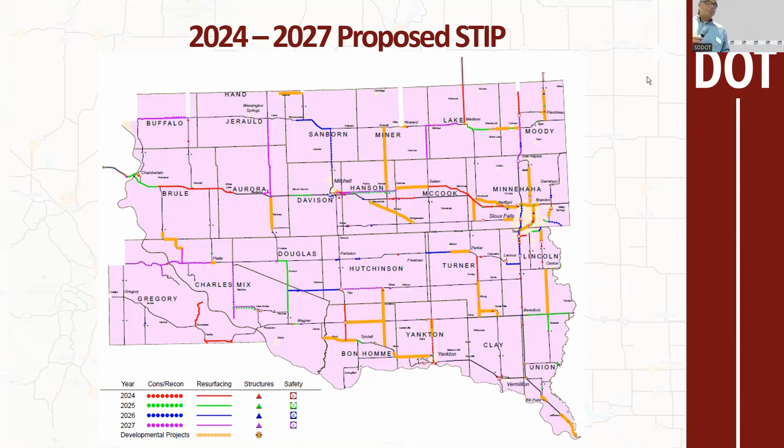If you didn't get a chance beforehand, take some time afterwards and look at what we have available. Again, we are here for engagement and collaboration. I challenge you to start writing down ways you think we can help improve safety across our state.

In order to maintain or build a transportation network, we need funding. As we look at the funding anticipated over the next 4 years, we range from $1.2 billion to about $900 million. A couple of big projects are really looped into that mix.

For those of you that travel that Platte-Winner area, we have a small bridge down there over a mile long. That bridge alone is anticipated to be over $250 million. Some of you are intimately familiar with it tonight, others may not be, but we are planning to reconstruct that bridge starting in 2024, probably a 3-year project.

It's a huge undertaking for us. We thank our partners in getting that project to where it's at today. We look forward to that construction project being approved by Federal Highway Administration this fall, so we can get it out the door. A great project.

But it takes funds, it takes those dollars in order for us to invest in that transportation system. And that's paid for by user fees. Whenever you're driving on that road, you have a fuel tax — the fuel you put in your car, you're burning fuel, and that fuel tax helps pay for those roads. Also vehicle excise tax. Those are the user fees that help build and maintain transportation.

Whenever we have an investment, that opportunity to invest, what are our first priorities? Our first priority is going to be safety. Our goal is to get everyone home safe every day.

This shows a history of crashes, serious injury, and fatal crashes in South Dakota in recent history. We were on an excellent trend through 2019, 2020, 2021, and then not so good — something we saw nationally. A lot of driver behaviors got involved: speeding, unbelted occupants, intoxicated drivers. We really started to see an uptick in those years.

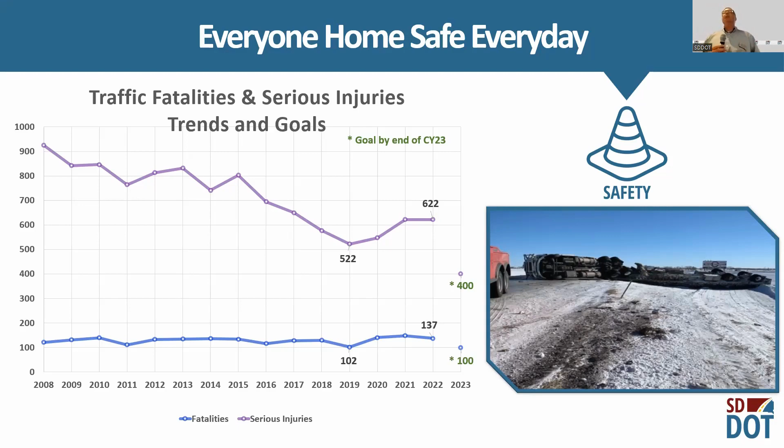We've tried various countermeasures and we're going to continue to be innovative: centerline rumble strips, shoulder rumble strips, high friction surface treatments — all things intended to keep that driver on the road when maybe they're not paying attention, maybe they're making a mistake. We all make mistakes, we're human, it's going to happen. But what can we do to help correct that driver so they don't run into somebody else or crash themselves?

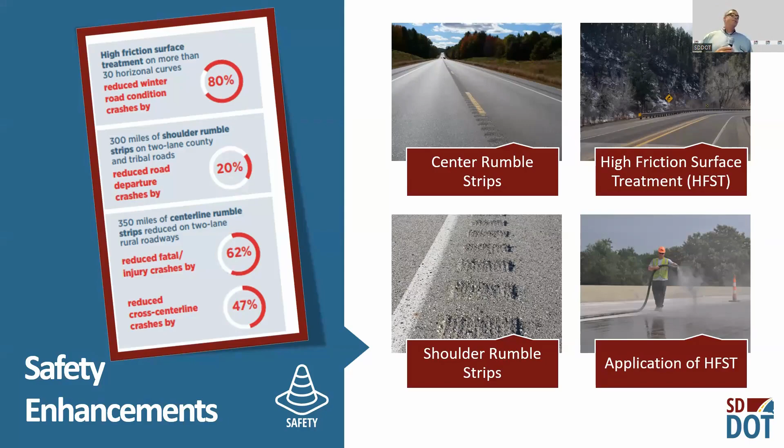Other techniques we've used are diverging diamond interchanges. We actually got our first one open — if you get out to Rapid City, please take the LaCrosse Street interchange and let us know what you think. We had an opportunity to be out there about a week and a half ago, and it was working marvelously. People got through there very efficiently.

For those who've been out at the LaCrosse Street interchange and ever stopped trying to make that left turn movement, you know that sometimes you get backed up for a block or 2 blocks, especially in the morning. It was just unbelievable how seamlessly that worked — people knew where to go. Pedestrians too, I think I saw 6 pedestrians using that facility while we were there, and they felt comfortable. It was a very good improvement, and we're expecting and hoping for the same thing here at 41st Street.

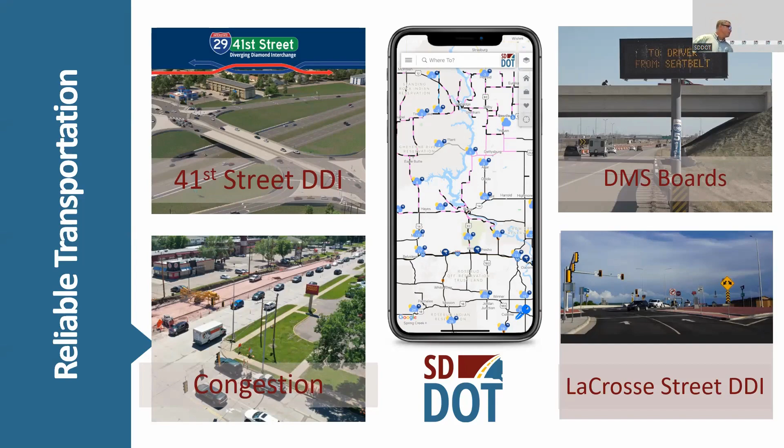Now, Travis, I know safety is a priority for the region as well. Maybe just go over a couple things you're doing here in your Mitchell region. Yeah, absolutely. Next slide there, Levi.

Like Mike said, safety remains our highest priority on our roadway system. Over the next 4 years, we'll have approximately 29 grading or shoulder widening projects here in the Mitchell region. This graphic gives a general idea of where some of those projects are. Our shoulder widening projects are meant to mitigate roadway departure crashes, which are really prevalent in South Dakota and a lot of other rural states.

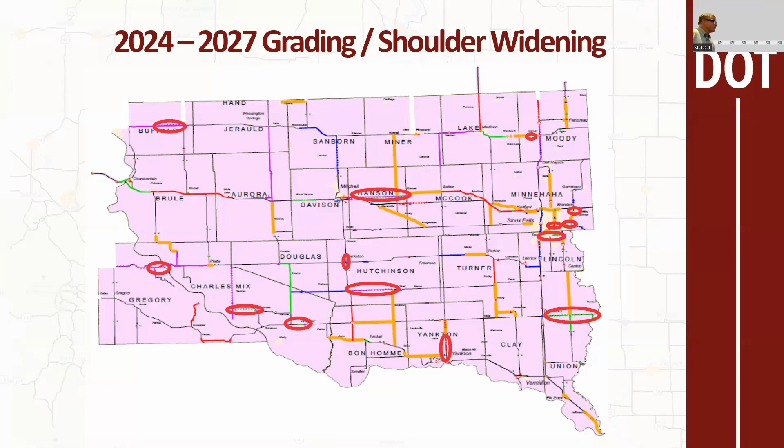Those shoulder widenings also allow places for disabled vehicles and slow moving equipment to get off the roadway to promote safety. Along with that, we have a lot of grading projects coming up as part of those 29. Grading projects enhance the roadway geometry—we flatten the hills, straighten out the curves, reduce no-passing zones, and improve sight distance. So the inherent nature of those grading projects improves safety as well.

In addition to those projects, we also have some standalone safety projects in our region over the next 4 years. We have another 9 projects that will do intersection modifications, happening on 14 different routes within our region. Those strategies range anywhere from intersection realignment to permanent traffic control changes, signals in some cases, roadway lighting, and others.

We have high friction surface treatment, which has been very successful here in the Mitchell region and all across South Dakota, with 6 locations identified. In 2026 and 2027, we'll be installing our first median cable guardrail in the state of South Dakota. As you can see in the photo, the strategy is to reduce the potential of crashes occurring across the median, so we'll have those projects coming.

Safety is important to all aspects of transportation, all modes—including bicycles and pedestrians. We have 22 projects that will be adding shared use paths, sidewalks, or ADA improvements to enhance pedestrian safety, promote connectivity, and accessibility in those communities. Each project really has an element of safety to it, and that safety aspect is the one thread that ties all those projects together.

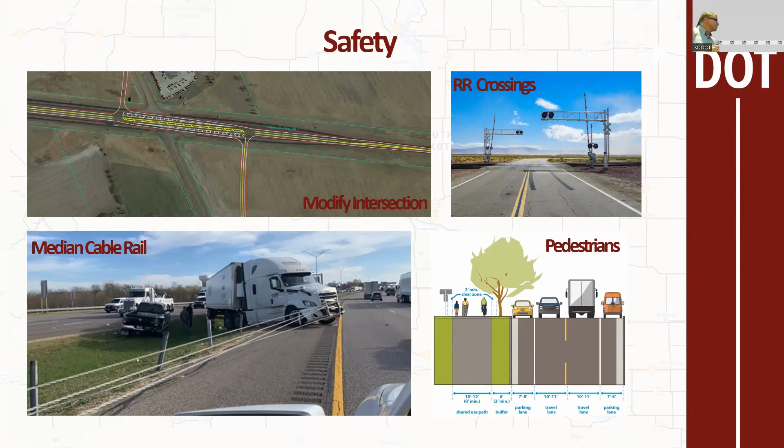Travis, looking at the median cable barrier on that lower left-hand corner, is that something that's going everywhere, or are you looking at spot locations? What are you thinking? Yeah, we're looking at select locations—we've been through the scoping process now, really looking at the higher volume areas of I-29 and I-90 in Sioux Falls, using the potential of crashes along with any crash history, trying to leverage those two. That's correct, looking at those hot spots.

So again, we need some input. Where do you see opportunities for safety? I'm looking from a general standpoint—we'll get into the project specifics towards the end. Travis is going to go through quite a few projects, so just generally looking at safety, where do you see opportunities? I'm going to focus on 3 areas.

One of those, Travis, you hit it when talking about grading and shoulder widening projects—our number one fatal crash in South Dakota is a single vehicle runoff roadway. Our number 2 fatal or serious injury crash is intersection related. As we look at intersections, we have a lot of them, over 80,000 miles of road in our state, and those roads intersect. So what have you seen in other states? What have you seen elsewhere? What ideas do you have? How can we help improve safety on the road or at the intersection?

We've got to remember the person too—what about in the car? The safest road out there still relies upon that human to make good decisions. Whether you have a 40-foot wide roadway or a 100-foot wide roadway, people still make mistakes. So what can we do in that area as well? How can we help to improve those aspects that really influence crashes and fatal crashes in South Dakota?

So I'm going to ask for input. If you're interested in providing some input, please raise your hand. Mark's got the microphone, so please—one up front, Mark.

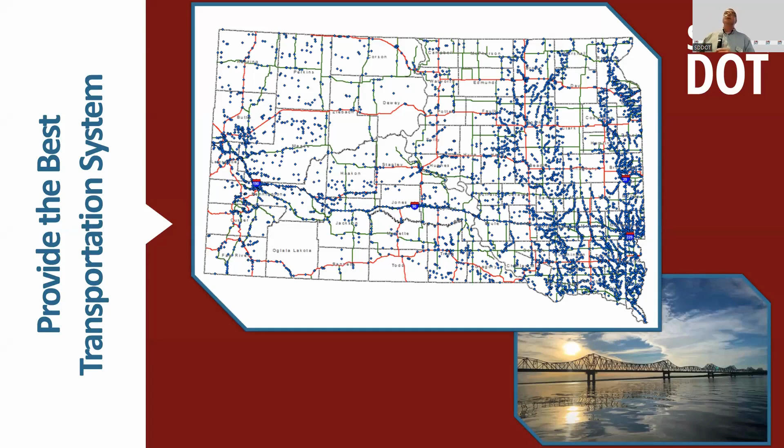So safety doesn't work unless we actually have a transportation system, and I'm going to talk very briefly about what the system looks like. These are just the bridges here in South Dakota, and they actually look like creeks or rivers on a map because we have bridges over all those tributaries and rivers. As we look at our structures in South Dakota, we're generally in pretty good condition overall from a state system standpoint. You can see we're over 97% of our bridges in good to fair condition. We're starting to anticipate a bit of a drop-off.

I talked about the Platte-Winner Bridge, you can build a lot of bridges for $250 million. We also have other projects coming up. Obviously Pierre Bridge is under construction right now, another major project, and we're going to be looking at the Forest City Bridge up near Gettysburg and Mobridge, and we have the Deadwood Box.

So some very, very large structures are coming up for construction here in South Dakota. They play a big part in what we're looking at for the future, but trying to plan for those investments and ensure that we can manage all the transportation while we invest in those structures is critical.

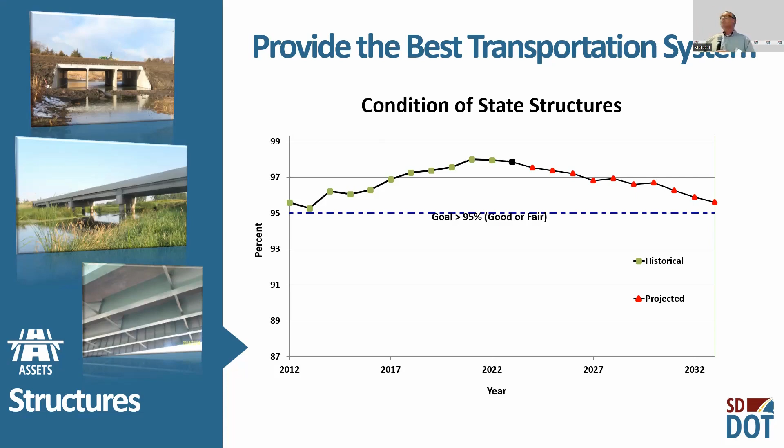So we're also focusing on new ways of doing business, better ways of doing business, trying to improve flood resiliency. Looking at stainless steel rebar installation on our bridge decks. Obviously, we put a lot of salt down in the winter. Salt, water, steel, they don't mix. They turn into something else called ferrous oxide, and that's not good for our bridge decks. Pops them all over the place.

And also using unmanned aerial systems or drones trying to do our inspections, ensuring that we're catching issues and items early. Without pavements, all you have is just a bridge over water.

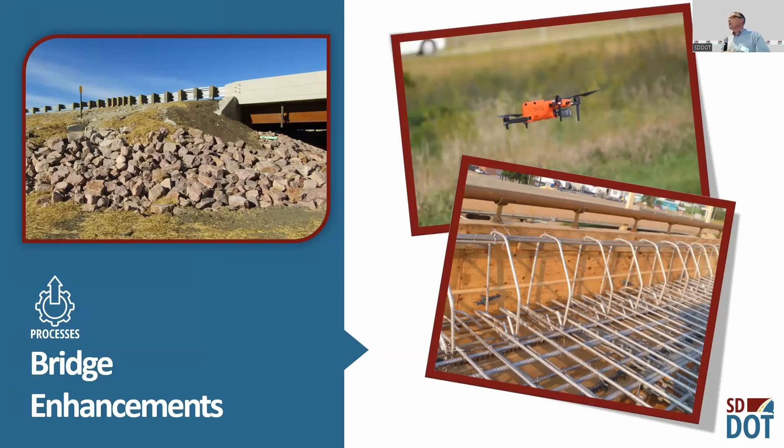So we got to talk about pavements a little bit too. This slide just kind of shows our pavement condition, where we've been, where we anticipate to be in the future. Overall, our goal is to maintain 80% of our pavements in good to excellent condition. You can see where we're at today, we're about 90% of our pavements in good to excellent condition. We're projecting that to go up a little bit in those poor and fair condition elements. Again, nothing to be too alarmed about, but as that transition occurs, we're going to see some rougher roads than we see today. But in the same sense, we're trying to maintain that healthy balance of transportation and investment across our state.

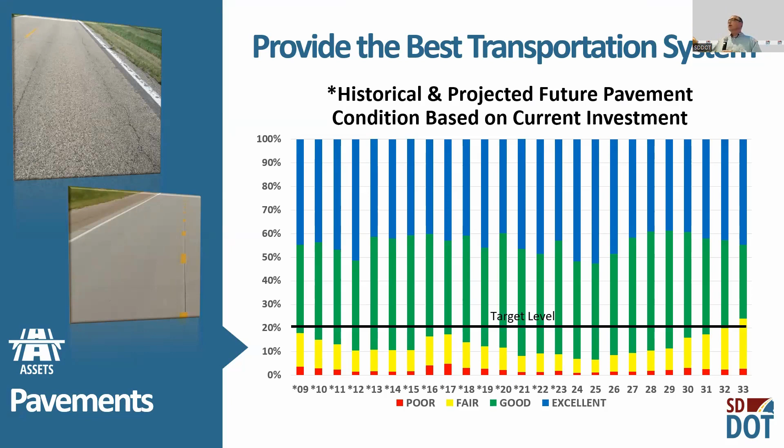Again, we're trying to innovate, whether we're looking at notch wedge joints, next generation concrete pavement, or intelligent compaction in the upper left-hand corner. No, that is not a fish locator, that's not the new one that's coming out, but instead it actually GPSs that rollers are going along with heat sensors that allows us to see how well we're compacting that asphalt when that construction project's actually being built. Again, allows a better product at the end of the day. So we're trying to mix innovation along with investment to ensure that this investment lasts for generations to come.

Travis, maybe a little bit on what's coming up in the Mitchell region.

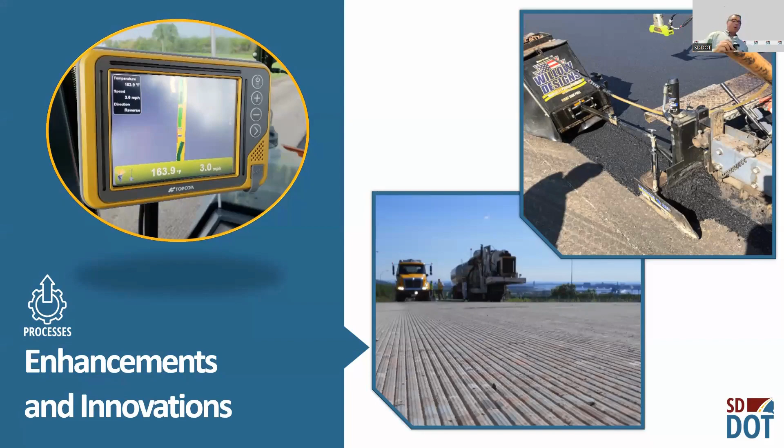So over the course of the next 4 years, we're going to be making a significant investment here in the Mitchell region. We're planning on resurfacing almost 600 centerline miles of roadway and making shoulder improvements. With that, on our structures, we'll be doing bridge rehab or maintenance on 80 of those structures. 25 bridge replacements are planned over the next 4 years. Included in that number are 6 interchange reconstructions with a programmed amount of about 200 million for interchanges, 5 of those being here in the Sioux Falls area.

Aside from the projects above, we also have funding in our program, 116 million transportation alternative projects, carbon reduction program, and the protect projects on a statewide level. You'll see in our STIP right now, some of those are placeholders until projects are identified. We have almost 135 million in pavement preservation projects, so concrete pavement rehabilitation or chip seals or crack seals, focusing on maintaining the system that we have out on the road. And then along with that, we also have funding in our STIP for the local system. So that funding comes through our big grants and our federal bridge replacement grants, along with some other programs that we have, county pavement marking, signing projects.

So overall, we're planning up to $1.5 billion in investments in transportation here over the next 4 years. These projects will improve or preserve nearly 50% of the 2,300 centerline lane miles that we have in Mitchell region.

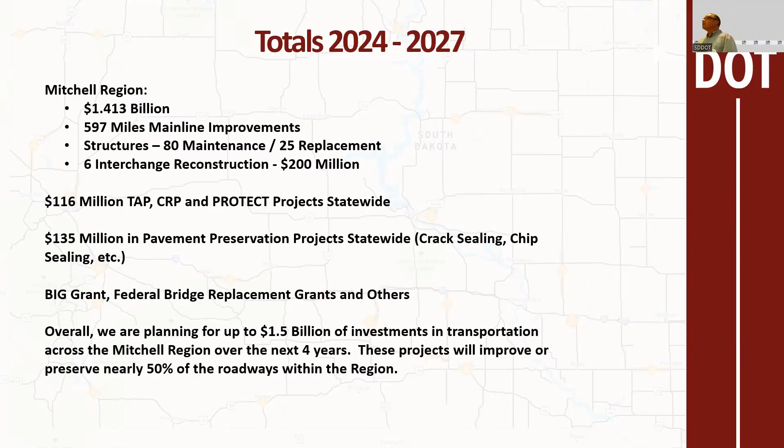So as we look at investments into our pavements and that infrastructure, again, I'm going to ask you, how can we get better in the pavements and the bridges or lighting, signals, et cetera? What have you seen that's worked out there? What's worked well for us? Where have you seen issues?

One up front. Thank you.

Shannon Austin again, City of Sioux Falls. Certainly, I always appreciate the new ideas that DOT is putting down on our pavements. For the City of Sioux Falls, we're always impressed by all of the innovative ideas that you're using on street reconstructions in the City of Sioux Falls. Where I'm coming from isn't necessarily pavements, bridges, or lighting, but basically on the carbon footprint, and maybe that falls more into the landscaping, your native prairies. You guys can build anything and you do it really, really well. But in order to really have a sustainable corridor, you really got to plant more trees that aren't breakaway trees, and flowers that sustain bees and the native prairies. I think that's part of the infrastructure that you have to consider also along your corridors.

I have a perfect example on the South Dakota rest area that's right at the Minnesota border. My parents live right there at the Minnesota-South Dakota border and used to have the big, huge welcome to South Dakota sign. And you had beautiful trees and flowers when you had the welcome to South Dakota sign. And then when we redid the rest area, which is a beautiful project, you moved the welcome to South Dakota sign further to the west, which isn't as easy for people to get to. And there's no flowers around it. There's no walkway to get to it because people love to take pictures next to the sign. So I always think that maybe you could take the infrastructure one step further and do a little bit more on the aesthetic side of it.

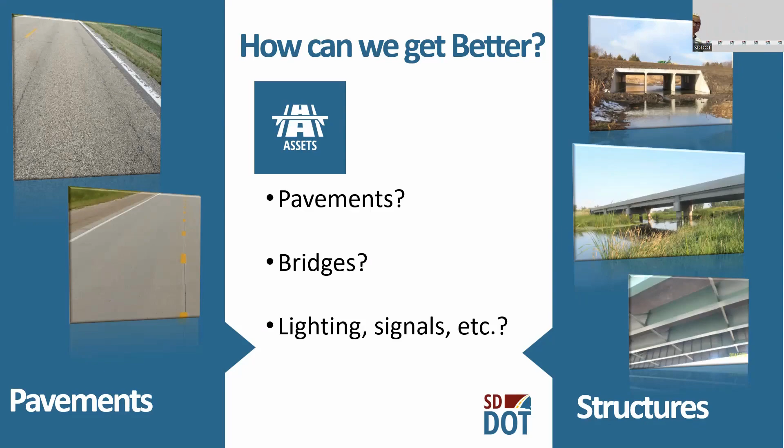All right, Travis, do you want to hit a couple of spotlight projects and we'll get into some project specific questions? Go from there. Yeah, so talking about a few of the projects that we have each of the fiscal years. Certainly and undoubtedly the biggest project we have here in both terms of cost and size of project is Platte-Winner Bridge on Highway 44. With this project, we'll be regrading Highway 44 both on the east and west side, so we'll be addressing some slide areas that we have, improving the roadway geometry, and then ultimately realigning so we can construct the new bridge to the north of the existing bridge. So we get the benefit of being able to maintain traffic at all times during construction with this project.

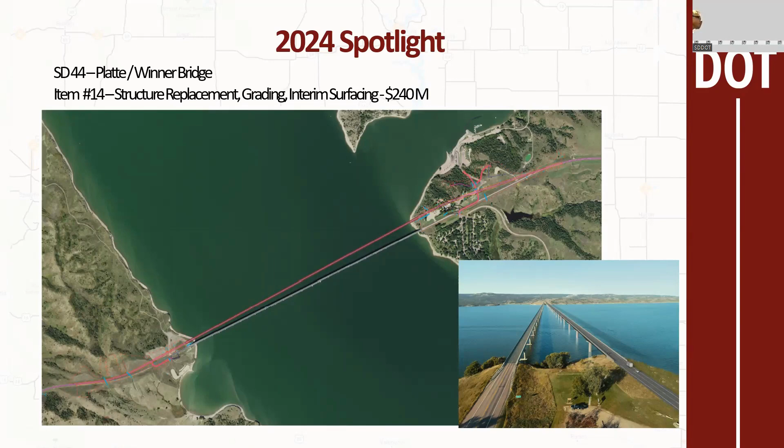You can see on this alignment that the new alignment does affect Snake Creek Recreation Area. So we have a project in 2024 to mitigate some of those impacts to the maintenance building, residents, some of the campsites, and interior roads. This is a $240 million project. We're expecting to let this project middle of next year. Not sure if work will start the first winter, but we're expecting this to be at least a 3-year project for construction on the Platte Winner Bridge. It's a 20-span bridge over 5,700 feet long on drilled shafts founded into Lake Francis Case.

Just wonder if you took a look at a box culvert option there. Yeah, we did look at it. It just won't work out hydraulically.

Another 2024 project, South Veterans Parkway. This slide shows a series of 4 projects, 8.5 miles. The current project under construction right now is Western Avenue to Cliff Avenue. That project is not in our 24 to 27 tentative STIP, but the other 3 projects are. It's a 6-lane limited access expressway on the southeastern part of Sioux Falls. The purpose of the project is to enhance the existing transportation system and prepare for the future traffic volumes coming with the growth in the area.

Item number 40, I-29 to Western Avenue, is an FY24 project. The next project, Cliff to Sycamore, will be FY25. That's item 129. And finally, item 199, Sycamore to 57th Street, will be an FY26 project. Completion on the final project is expected late 2026. Once that project's completed, we'll finish the 17-mile corridor from I-90 to I-29. You can see the total cost for those 4 projects — the 3 projects in the tentative STIP total $205 million.

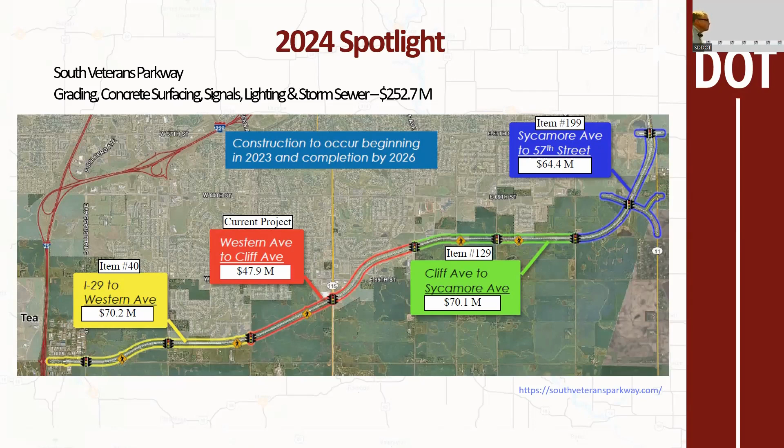A 2025 project here is Highway 50, from 1804 to US Highway 18, west of Lake Andes. As you can see in the photo, not much for shoulders on this road, so it's a regrading project. We'll be adding shoulders to this highway and correcting some of the deficient vertical and horizontal curves. We'll also be looking at the intersecting roads, particularly on the east end, as they enter the highway at a pretty severe skew, so we'll be taking a look at those connections.

This is a 9-mile project. We're going to be building this one in 2025. There's some pipe work on this project, a box culvert replacement, and this project will finish up with an interim surfacing in 2026, followed by the asphalt surfacing project in 2027.

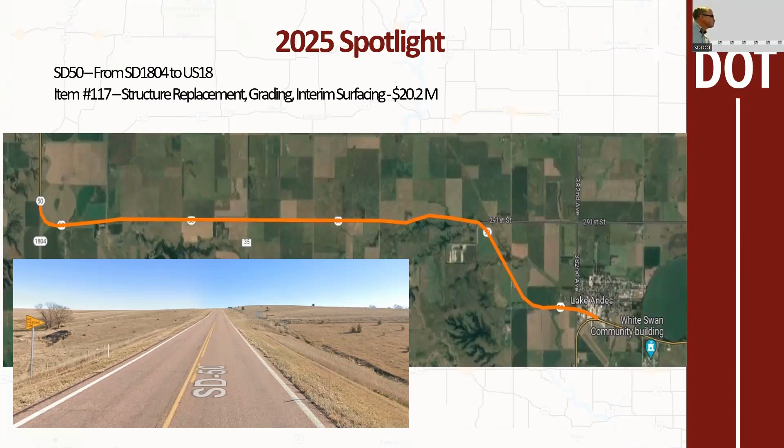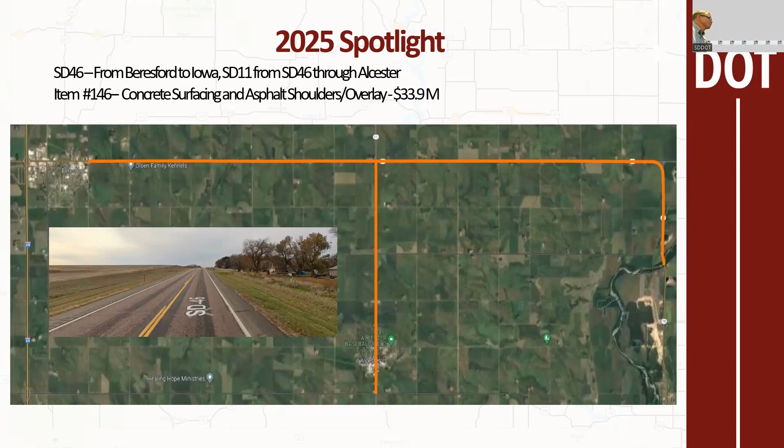The next one is a 2025 project as well — surfacing work happening on Highway 46 from Beresford to the Iowa state line. That will be concrete pavement with asphalt shoulders. Along with this project, we'll also be doing a mill and overlay on Highway 11 from 46 down through Alcester. I wanted to highlight this project — it's actually the surfacing work that follows the grading projects happening in 2024 and 2025. So almost a $34 million project on the books. Once this project's complete, we'll have recent improvements on Highway 46 all the way from the Iowa state line to US 81 — about 48 miles of improvements here in recent years.

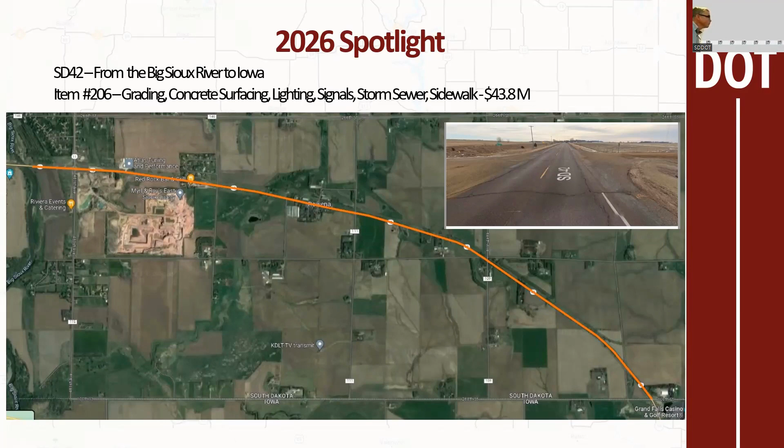This project in 2027 is on Highway 37 through Parkston. This is one of our urban grading projects I referenced earlier. This work is scheduled for 2027, mainly to address pavement condition. There's much needed ADA upgrades and some drainage concerns within Parkston, so this project will address those needs. We're going to be retaining the existing 3-lane section, putting it back in with a concrete roadway.

This project is just a little over a mile and expected to be complete in 1 year. If you want more information on this project, we are having a public meeting in Parkston next Tuesday at the Emergency Services Center. That meeting starts at 5:30, so if you'd like to check that out, we encourage you to go to the public meeting.

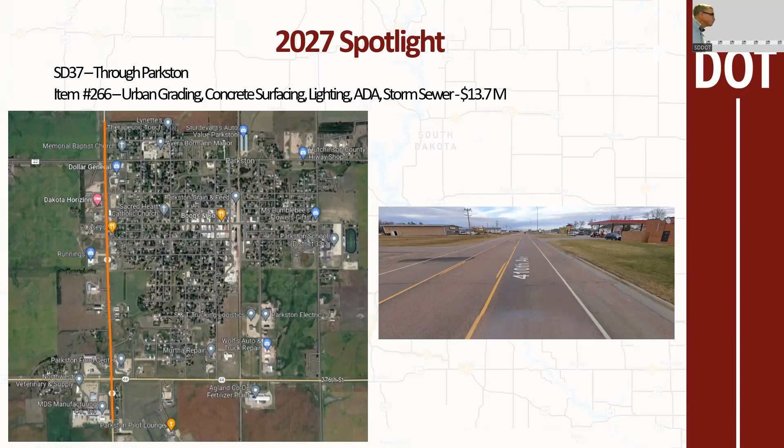All right, the last project I have is Interstate 229 here in Sioux Falls. This is exit 3 at Minnesota Avenue. Along with this project, we'll be reconstructing both of the bridges on I-229 over Minnesota Avenue. We're also coordinating with the city of Sioux Falls to make some nice improvements on Minnesota Avenue from the Big Sioux River up to 39th Street.

This is expected to be a 2-year construction project. It will start in 2027 and go through 2028. We do expect there will be some work in 2026 with temporary diversions and setting the temporary bridge to carry traffic, so we can maintain 2 lanes on Interstate 229 all throughout construction. This will convert the interchange from a single diamond interchange to a much better functioning single point interchange.

Thanks, Travis. Maybe just a couple things to hit on. There's definitely a lot of work coming up, especially around the Sioux Falls metro area. I assume that if you have a chance, what would you like to tell folks about the upcoming reconstruction?

Be patient, take your time. We have a lot of improvements planned, and as you drive around Sioux Falls today, you see construction everywhere you go. I think that's just the nature of South Dakota, we have 2 seasons, winter and construction. So we'd be thankful it's not winter at least, right? We have a lot of work and we ask for people's patience. Typically it doesn't take long to find an alternate route and find out your commute is not that much longer than it originally was. So be patient, the improvements are worth it once we get through the project.

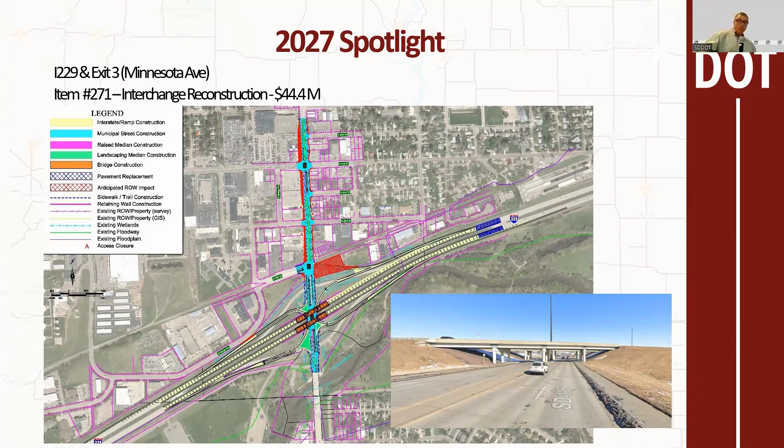Great, thank you. Okay, just gonna move on to the last slide, which I assume there's several folks who want to provide additional questions and comments regarding individual projects or other things they're seeing. Looks like we've got one right here in the back.

Mike's got one. In reference to. Mike, we'll get you a microphone.

Mike Healy, thanks. In reference to those bridges and the cost of those bridges, like the Platte Bridge, does the cost of $240 include the removal of the other bridge? And is that consistent with all of them? Then the cost includes the removal, or isn't that calculated at this time?

Yeah, great question. So the cost would include removal of the structure, so the old bridge will be removed with the construction of the new one. Obviously we're going to wait till the new one's open and working fine and we've got all the kinks out of everything, but then we'll take the old one down. So the old bridge is coming down after the new one's up, and it should include that cost as well. Okay, thank you.